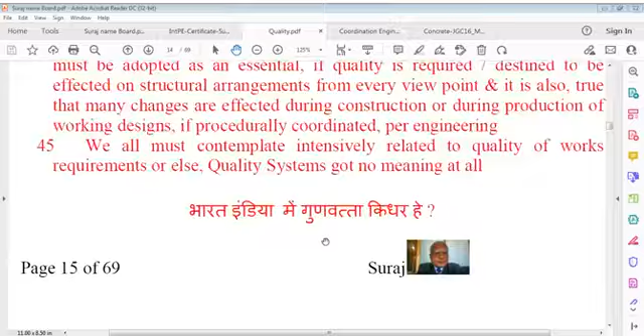And that's why I say real quality and real coordination are very important. And if you go down to that, you will find many things. I'll find something which I'm interested in, and it can be said that thinking and all that, thinking, synthesis, as I said, no conclusion without analysis, as we said here.

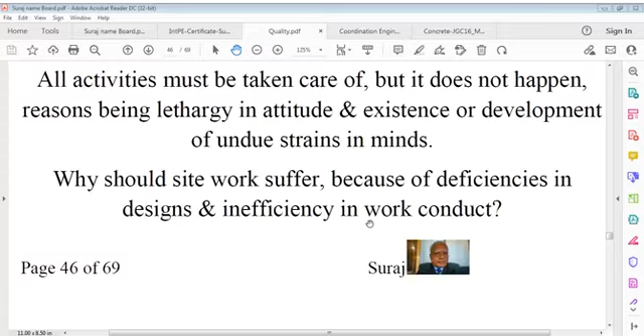Quality, reliability is defined, and we also say that reliability, risks are involved in this, cost is involved, time is involved, as we usually consider. These are certain factors we cannot leave out. Construction method statements are involved, which I say must be charted out professionally for works implementation. And also we can say, so these are certain points, certain references, I could sort of say.

That it can't be brought back, it is irrevocable. If we lose it, we can't recover it. And this is only money. Money means money in the sense of use, and if I don't use time, I cannot use it again. If I lose it, I lose it.

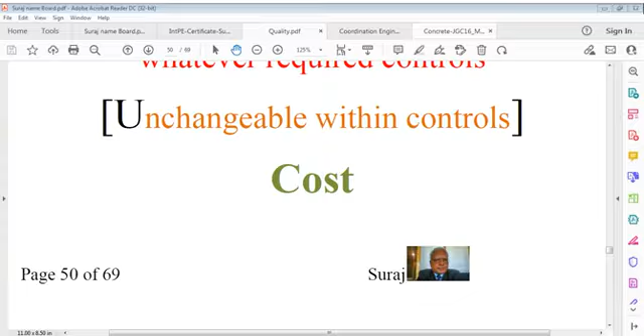Cost, I think, originally is nothing. It is just in relation to time. But cost may be recovered, it may not be recovered, but time lost cannot be recovered. And then you can say risks.

Risks are such an important factor that an intelligent, analytical person can understand, can foresee what sort of risk will be there. And also by experience we know how to think of that. And also we can say reliability, which is a very complicated word, complicated in the sense that it's not a single verb.

Or some adjective, it's a sequence or consequence, or you can say it's a kind of thread or a kind of string that you use in a word, and that includes safety from all involved factors, successful serviceability of intended purpose, and mandated durability. Durability, safety, and serviceability are very important factors, a minimum required. There can be many more added upon it.

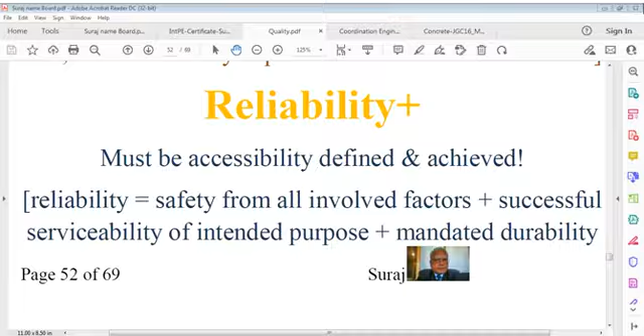And then comes analysis, which is educational power. Education should teach us about the power of analysis. In our education system, our professional system, whatever we learn, if we are not equipped with the potential of analysis, then I can't call myself educated, even if I'm a doctorate, a master's. But if I cannot analyze, I think analysis is the real word in place of critical thinking. Thinking is not enough if I can't analyze what I'm thinking.

Thinking is also related to analysis, and there may be many points, many sequences in analysis for some problem, to solve or to understand, even not to solve. Observe something and understand it, analyze it, and if you do that sequence correctly, it can be called a system of this activity, this observation, this object, or this system, whatever you can call it, entity. You can say I understand this completely, I've gone through its study, and my analysis says that it works like this. That's also analysis, though you have not added anything to it, you have not designed that. But try to analyze and go through total scrutiny, and you reach somewhere, okay I understand this way. That's also called analysis. In fact, science is based on complete observational analysis.

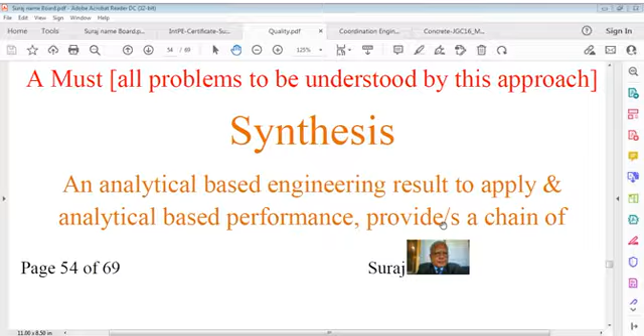So analytical work and synthetical work, both are important. Both are linked together. It doesn't mean physical change, it is really reorganization. Synthesis can be called organized, and analysis can be called study of every organ within that synthesis. So you can say analytical based engineering results in applying analytical based performance by chain, and therefore I think it's very important to understand that.

And thinking plus thinking, if you think and think on the same topic for long, it can be called concentration. But you do not divert your focus from what you are thinking, and you keep on that, and you get more and more power from your mind. This is practical, there's no requirement of any medical study on that, it is observation, feeling, experience. And to achieve everything, you should have that power.

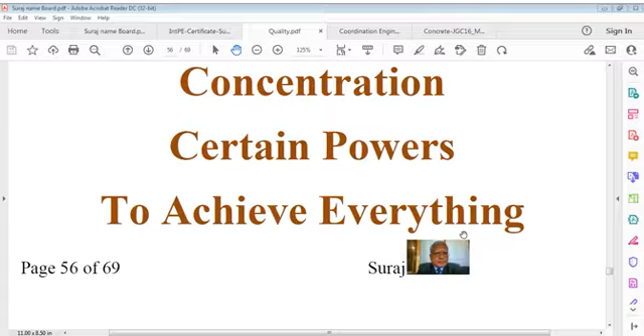If you have that power, you shall apply that. If you get that power, that concentration, there is no way you can leave it behind and go away, because more and more thinking means more and more concentration, and more concentration means more and more internal entertainment of mind, where you cannot say I'm feeling bored, rather you feel too happy, and if something else comes into your way, you don't like it at that moment. So to achieve everything, concentration and thinking are very important.

And we can say that thinking based contemplation must be achieved, and that's what design and execution works we call it. In fact, design is analytical work, concentration work, and we can call it engineering business, and we should not go against that. Whatever we decide, whatever we say, we have to achieve this, and that we have to conform with.

And if we cannot conform with that, it's called a non-conformist product, a substandard one, you can call it. To whatever level of substandard it is, it can be rejected also, because it's against that provision, against that engineering requirement which we decided, and no concession can be granted to that. Non-conformance means the engineer involved is careless, ignorant, or incompetent, and therefore redundant personnel.

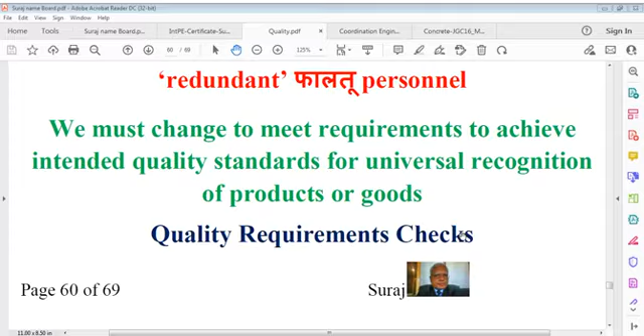Redundant means more than required. And if it's more than required, what do we use that engineer for? So we can say, if we have to do that, quality requirements are important, and quality means what we mandate.

It's a must, and we have to blame ourselves for quality achievement failure. If I say we could not achieve quality and give some reason for that, I don't think that works. Engineering is very serious as far as work is concerned. It's a very happy moment if you successfully do it. Engineering has both properties. If you are not able to get quality and production, you don't feel happy because you could not meet schedule or meet your target. This means it's a failure in engineering, both in quantity and quality.

And therefore, continuous improvement of quality is required. If you say continuous improvement of quality, abbreviated as CIQ, this means it should be completely continuous improvement of quantity also, because quality and quantity live together. They cannot live in separate areas, like Mr. Quality sitting here and Mr. Quantity sitting there. We cannot physically do it.

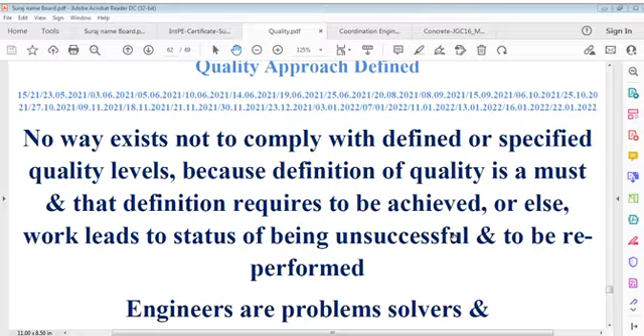And therefore, we can say no way exists not to comply with defined or specified quality levels, because definition of quality is a must. That definition requires to be achieved, or else work leads to status of being unsuccessful or has to be performed again.

Engineers are problem solvers, not problem creators. Engineers are problem solvers, and engineers are developers. Engineers are agents of change, agents of social change, design change, materials change, geographical change. That's an important point we have to think of. It's not because I am an engineer that I'm stating that, it's basics of engineering, because engineering means change, change and change.

Using mind, an engineer can convert a forest or a desert to a city or an industrial town, for which quality and safety, health and environment play integrated and merge vital roles in all respects. No concessions. In public, and if done without quality, you have acted against profession and nature.

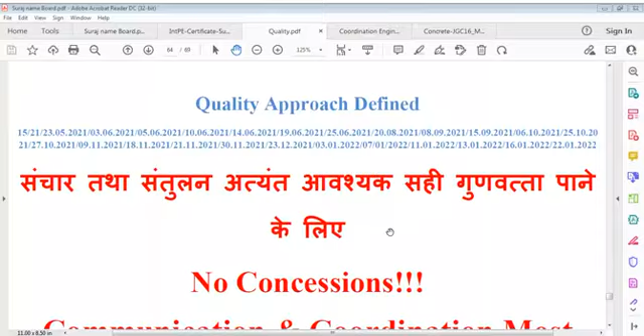Communication and coordination, most significant discipline subjects. Specifications is a must. Specifications are a must. Without specifications we cannot do.

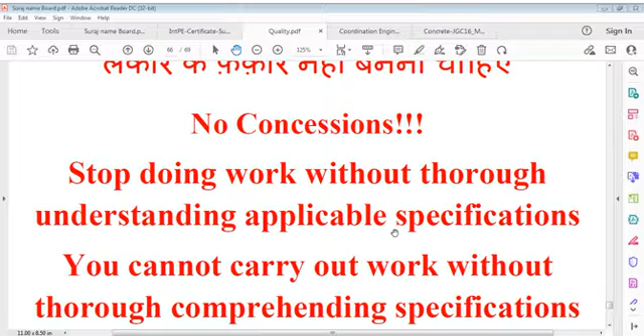Never follow any line which is not followable or not applicable to us. No concessions can be given, and if you do not know what to do, stop working without thorough understanding of applicable specifications. If you understand that you are doing right, that's fine. Otherwise, if you don't understand in clarity what is to be done, better delay it, because doing the wrong job is no good. It is better to delay rather than doing incorrect work, because once you involve material and workers and everything, then break it.

It's no use, it's national wastage and natural wastage both. You cannot carry out work without thoroughly comprehending specifications, and you must understand what you have to do, and that's called comprehension of specifications. Quality in construction, quality in life, quality in service, quality in every work, quality in education, quality in society, quality in individual. All these are equally important.

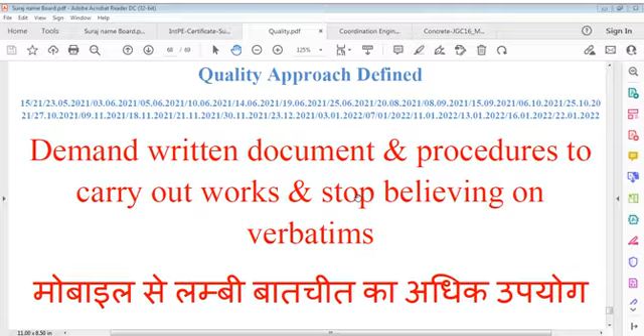To an extent, just like we have a breathing system in our body, in the same way quality breathes in works. And therefore it should be in document what we have to do. It should be written clearly. Demand written document and procedures to carry out works, and stop believing on verbatims.

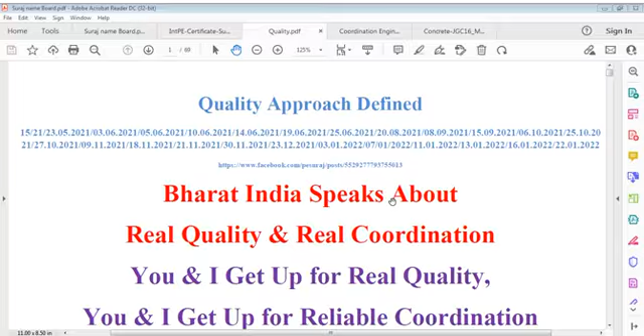That's what's important. As said about mobiles, we don't talk too much on mobile, because it wastes your time, wastes the time of others, and unnecessarily wastes your energy. You have to talk to others, and others have to talk to you. You have to provide opportunity to everybody. Other person should not wait to contact you just because you are busy somewhere else, and that's not good practice. Don't waste your money, don't waste your time, don't waste your energy. That's what Bharat, India speaks about.

Bharat is the Hindi word, India is the English word. Bharat, India - we usually say that just to arouse people, to enthuse people, that it is Bharat, we are citizens of Bharat, and we have to be like this. Bharat, India speaks about it, we have to be very much happy about that.

Real quality and real coordination means real, not imaginary. If real means whatever we define, of what work we have to do, how we have to do it, what's its real way, and under what economical consideration we have to do it, what's the intention behind that, what purpose, what for it is there. We have to define tolerances ourselves, define limits ourselves as engineers, or as those in power of works, and what the employer or owner intends for. If something is required for certain, we have to define that requirement.

It's not necessary everything should be same, it depends on what level of quality is required in this, what level of strength is required in this, that depends. And that's what technical specifications, item specifications required, include project specifications.

So that is what real quality design, you may call it design of quality, and you have to give it in written form, and that's called communication. And the written form should coordinate with all such communications. We cannot say one point here, other point somewhere else - that doesn't mean you do not coordinate on that. The real coordination is you have to put all these items in a kind of string, in follow-up sequence, so that you should be able to retrieve that immediately.

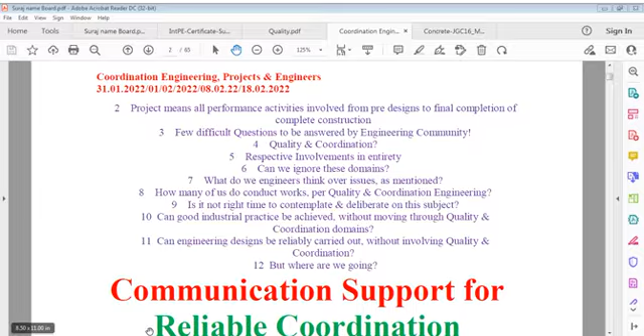What we are doing, that's the point. Often this is just a few words. I could not give more details on these projects I do, but I just don't find time for that. What to do means we have to understand coordination. That's the important one, you can say.

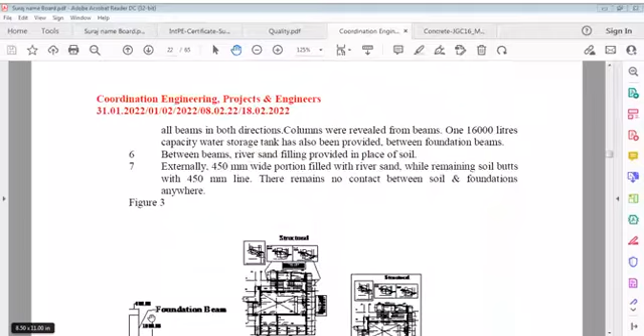Actually I thought in a different way, but it's happening as something else. So I can say here, coordination engineering is a must on every project, which is the title, and that point can't be defied. Every day something is important to be comfortable with, and we have to understand the reality of this: that coordination engineering is a must on every project.

Designs, construction, and controls are very solidly interrelated, absolutely interrelated, required sections for achieving from successful start to completion of a project, which all must be applicable throughout project stages, with all works being effective. That's really a wonderful point we have to think of.

Designs, construction, and control are very solidly interrelated, required sections for achieving from successful start to completion of a project, which all must be applicable throughout project stages, with all works being smoothly effective.

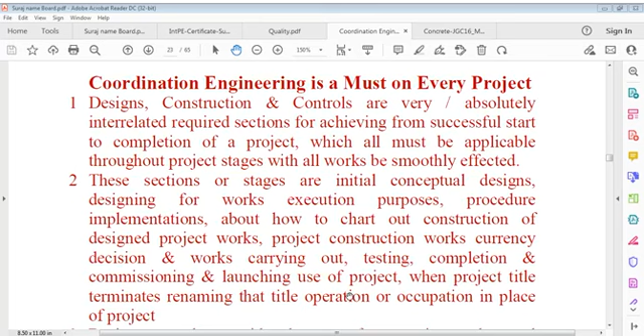That's why I said the designs, construction, controls are very absolutely interrelated, required sections for achieving successful start to completion of a project, which all must be applicable throughout project stages, with all works be smoothly effected. These sections or stages are initial conceptual designs, designing for works execution purposes. Designing for works execution purposes means initial design of project is different, but when you do it, that's also required to design how to do it. Procedure implementation, you can say, is about how to chart out construction of design project works. Then you can say project construction works, currency decision and works, all that. Carrying out testing, completion, commissioning and launching. All these are very important points we have to consider. We can't get rid of these without doing that.

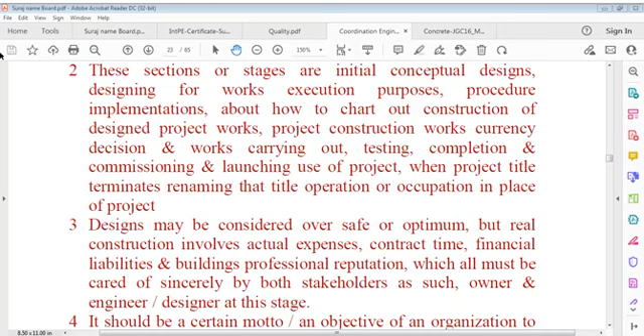So, like say, these sections or stages are initially conceptual designs and designing, and also you have to do it, and that's also called design. How to do it, how to plan it, how to work on all these requirements of doing, planning, scheduling, quality, method, construction, quantification, quality handling, testing, completion, electrical, mechanical, civil, or decoration, or whatever else. So much is involved. We should not be worried about that, but that's a different domain. Design part, construction part, planning part, quality part. Of course every part is specialized. It's not academically, it's specialized practically. It's specialized work-wise. So we must be sure about that.

You may say my design is safe or oversafe or optimum, but real construction involves expenses. Real construction involves materials, resources, time, everything, and use of that project. So that is a different world. Design cannot be done if it's not worth it, if it's not professionally done. I don't mean that you should do extraordinary design, but we have to design. Design should be done keeping in view ease of construction, best construction with best quality. And that's a point we have to see.

Difficulties on works which are expected must be anticipated by designers. Designer doesn't mean pure designer. Designer must have experience, or if one does not have experience, then one has to consult those who have such experience. Just like site people or works people consult experts in capacity as consultants. These site people's work is checked. It's also a kind of consultancy, you can say. You call a consultant, have check on this, examine, approve this one. That's also a kind of consultancy. The consultant makes sure, along with the site person, that this work is approved. Approved means I have seen this and I find there's no problem in this. Approval doesn't mean that it's authority or liability or something else. This means, okay, I have made sure this person has worked according to requirement, and that's just a kind of authentication that yes, we have seen this. But the responsibility lies with the person who did it. Remember, the consultant has no responsibility as far as liability is concerned.

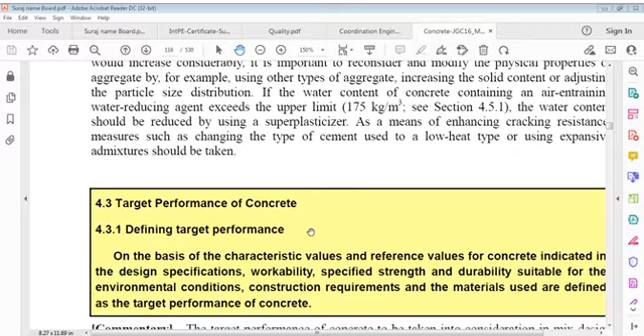and the determination of mix requirement, select materials and determine provisional proportions. We had gone through. Then we had gone through the target performance of concrete. Let's say what is target performance of concrete, defining target performance. Maybe if you have studied last time, no problem, we can review this.

Target performance on basis of characteristic values and reference values for concrete indicated in design specifications, workability, specified strength and durability, suitable for environment conditions, construction requirements and materials used, are defined as target performance of concrete. It says, on basis of characteristic values and reference values for concrete indicated in design specifications, workability, specified strength and durability, suitable for environment conditions, construction requirements and materials used are defined as target performance of concrete.

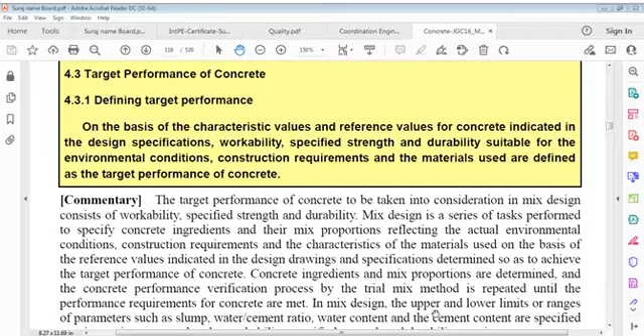Commentary says target performance of concrete to be taken into consideration in mix design consists of workability, specified strength, durability. We discussed this last time. Mix design is a series of tasks performed to specify concrete ingredients and their mix proportions to reflect actual environment conditions, construction requirements and characteristics of materials used, on basis of reference values indicated in design drawings and specifications, determined so as to achieve target performance of concrete.

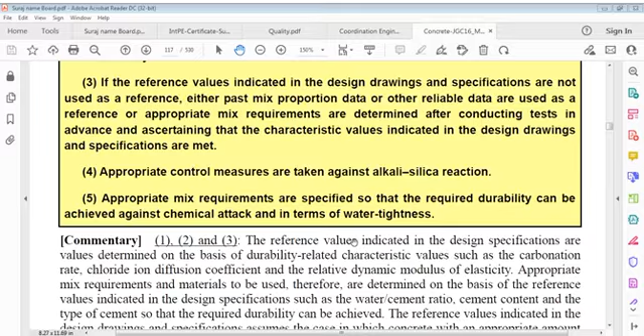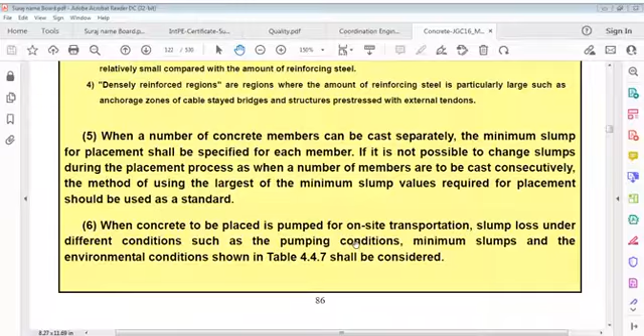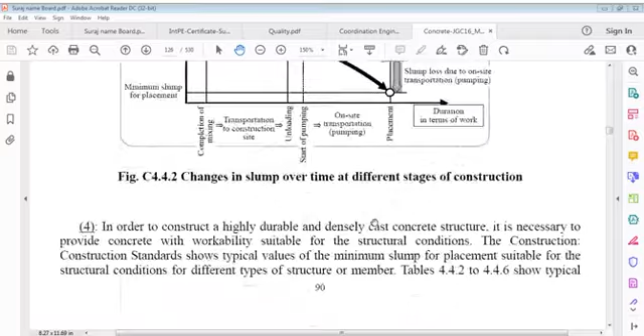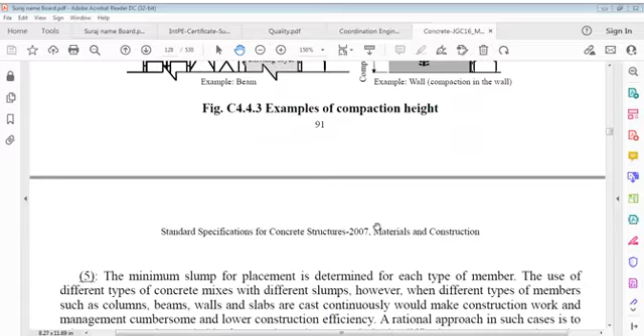Mixing water cement ratio we have gone through, and we had gone through. There are some mixed requirements we have gone through. We have gone through these slump values. I'm just trying to tell you what we had done before. This we had done, and of course we have to go to typical values of minimum slump we have gone through. I'm just trying to find means for something refreshing. Then we have gone through all this, and now we have to say we have gone through this also, flow chart for slump determination at different stages. And here is what we say. Here is, we'll go to this also we have gone through. Remember all these points we have gone through. Changes in slump over time, gone through. Standard construction methods, of course we have gone through this. We have gone through this compaction height as well, and we say example of compaction height that you have seen means from where we stand on the platform down to where concrete is, new layer of concrete is, and also previous layer we have to consider. It is more a design factor there. Okay, we have not gone through this, so let's be back here and think of how to do it.

Now required strength, here this we have gone through, this we have already gone through. Let us see this part, something to remember. Let us repeat this.

In construction standards, compaction height, which is related to degree of ease or difficulty of compaction, and placing height, which is a widely used term, are distinguished. Compaction height is defined as the height from the working platform on which construction workers stand to the lower end of the formwork or the upper surface of the previously cast concrete layer.

If concrete is placed continuously and compaction is performed while moving upward as the height of newly placed fresh concrete increases, the distance from the moved working platform to the surface of previously placed concrete is the compaction height. So let us repeat: if concrete is placed continuously and compaction is performed while moving upward as the height of newly placed concrete increases, the distance from the moved working platform to the surface of previously placed concrete is the compaction height.

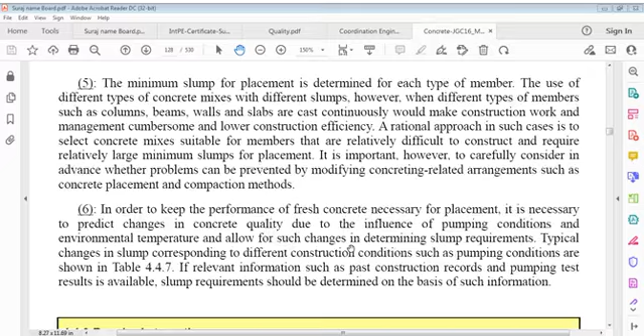It's important, however, to carefully consider in advance whether problems can be prevented by modifying concreting related arrangements, such as concrete placement, in order to keep the performance of fresh concrete necessary for placement. It is necessary to predict changes in concrete quality due to the influence of pumping conditions and environmental temperature, and allow for such changes in determining slump requirements.

Typical changes in slump correspond to different construction conditions, such as pumping conditions. If relevant information such as past construction records and pumping test results is available, slump requirements should be determined on the basis of such information. We also have to think of required strength of concrete, which is determined from the specified strength.

What is specified strength, and what is required strength? Specified strength and required strength - required is higher than the specified strength. It should be according to common sense.

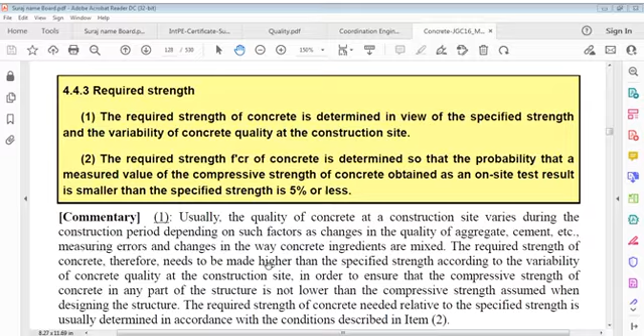Required strength, f'cr of concrete, is determined so that the probability that a measured value of compressive strength of concrete obtained as an on-site test result is smaller than specified strength is 5% or less.

What's the commentary here? Quality of concrete at a construction site usually varies during the construction period depending on factors such as changes in quality of aggregate, cement, etc. There can be measuring errors and changes in the way concrete ingredients are mixed. Required strength of concrete, therefore, needs to be made higher than specified strength.

Required strength of concrete needs to be made higher than specified strength according to variability of concrete quality at the construction site, in order to ensure that the compressive strength of concrete in whatever part of the structure is not lower than the compressive strength assumed when designing the structure. Required strength relative to specified strength is usually determined in accordance with conditions. Now, what are these conditions?

This clause describes compressive strength requirements for test specimens to be used to achieve specified strength of concrete.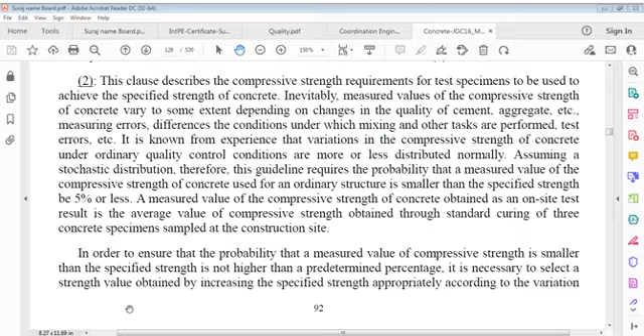Test errors, of course. It's known from experience that the variations in compressive strength of concrete under ordinary quality control conditions are more or less distributed normally, assuming a stochastic distribution.

Stochastic distribution - everybody would like to know what stochastic means. Not everybody can understand that, and that's fine. We have to explain it in Hindi. That's the problem - stochastic.

Stochastic meaning: stochastic is having a random probability distribution or pattern that may be analyzed statistically but may not be predicted precisely.

Let me refer to a more explanatory source. It's a Greek word. Stochastic refers to the property of being well described by a random probability distribution. Although stochasticity and randomness are distinct, in that the former refers to a modeling approach and the latter refers to the phenomena itself, these two terms are often used synonymously. Furthermore, in probability theory, the formal concept of a stochastic process is also referred to as a random process.

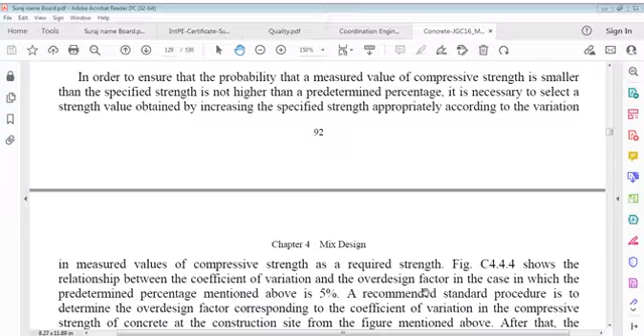In order to ensure that the probability that the measured value of compressive strength is smaller than specified strength is not higher than a predetermined percentage, it's necessary to select a strength value obtained by increasing specified strength appropriately according to variation in measured value of compressive strength, as required strength.

The figure shows a relationship between coefficient of variation and over-design factor in cases where the predetermined percentage is 5. A recommended standard procedure is to determine the over-design factor corresponding to coefficient of variation in compressive strength of concrete at the construction site from this figure, after which over-design factor and specified strength of an appropriate value are selected, and it should not be smaller than the required strength of that structure.

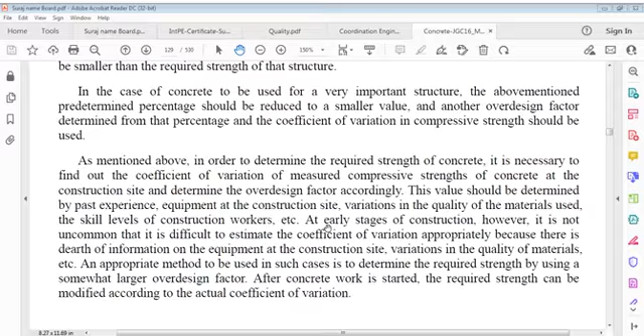In case of concrete to be used for a very important structure, this predetermined percentage should be reduced to a smaller value, and another over-design factor determined from that percentage and coefficient of variation in compressive strength should be used.

As mentioned before, in order to determine required strength of concrete, it is necessary to find out the coefficient of variation of measured compressive strengths of concrete at the construction site and determine the over-design factor accordingly.

This value should be determined by past experience, equipment at the construction site, variations in quality of materials used, and skill level of construction workers. These are the factors that determine the coefficient of variation and compressive strength on site.

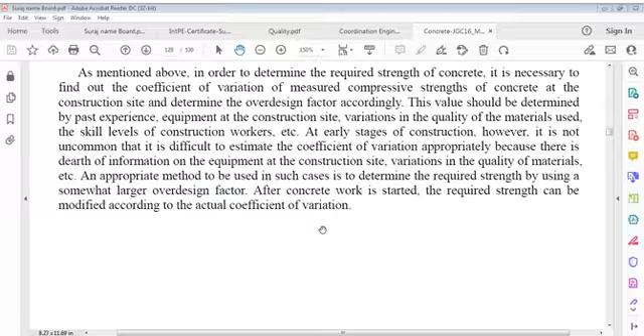At early stages of construction, however, it's not uncommon that it is difficult to estimate coefficient of variation appropriately because there exists a dearth of information on equipment at the construction site, variations in quality of materials, etc. An appropriate method to use in such cases is to determine required strength using a somewhat larger over-design factor. After concrete work is started, required strength can be modified according to actual coefficient of variation.

Now, the over-design factor in the normal case, here we have the expected coefficient of variation in compressive strength, that is V percentage wise. Expected variation, this V is for compressive strength, and over-design factor is alpha. Here it goes 5, 10, 15, 20, 25 in percentage, and this is the coefficient alpha. It's given an alpha value, and its equation is as follows.

This is 1 divided by 1 minus 1.645 times V over 100, in brackets. So if you plug in values, between 1 and 1 plus alpha, for example here alpha is less than 1.1, here maybe it's 1.2, here alpha is somewhere around 1.33, and here it goes to 1.7.

So this is the over-design factor depending on variation in compressive strength. As I said, variation in compressive strength and alpha factor - so more variation in percentage means more alpha factor.

That might be hard to understand. Alpha here - what is alpha? Let's say the equation is 1 divided by some coefficient, which would be 1 minus 1.645 times percentage.

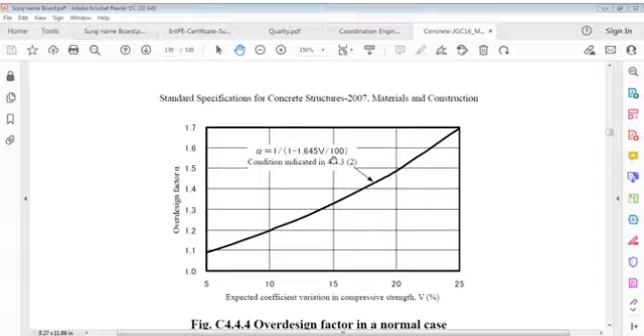1.645, 1 minus that, that's the margin, so it's something like that. We have to calculate it accordingly, and you can say this is generally at the 5% level.

Let's say there's some more variation. More variation means a greater value here and more less than 1, so the factor would increase, right? Let's say there's 25% variation - it says alpha is equal to 1.7. If it's 20% variation, alpha is about less than 1.5. If it's 15% variation, it's 1.33 something. And at 10% variation, it's 1.2.

So here, if it's 5% variation it's 1.1. And if there's no variation, that's what I say about water cement ratio. Water cement ratio, as you know very well, is a very important part of engineering, particularly concrete. It's a very, very important part.

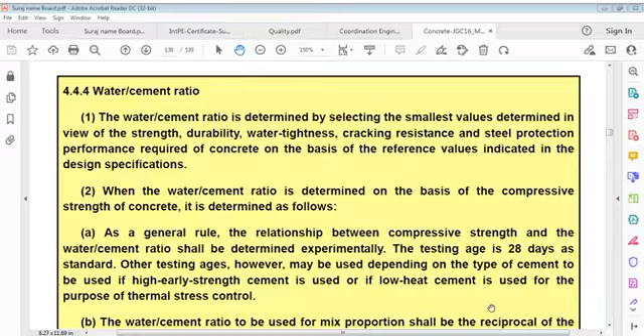This water cement ratio is determined by selecting the smallest value, determined in view of strength, durability, water tightness, cracking resistance, and steel protection. We have already studied this. Water cement ratio is determined by selecting the smallest value determined in view of strength, durability, water tightness, cracking resistance, and steel protection, performance required of concrete on basis of reference values indicated in design specifications.

When water cement ratio is determined on basis of compressive strength of concrete, it is determined as follows. So how to determine it? Let's see. Compressive strength of concrete, how do we determine that? As a general rule, the relationship between compressive strength...

and water cement ratio shall be determined experimentally. Testing age is 28 days, as we all know as the standard. Other testing ages, however, may be used depending on the type of cement to be used, if high-early-strength cement is used, or if low heat cement is used for purpose of thermal stress control.

Water cement ratio to be used for mix proportion shall be reciprocal of cement water ratio corresponding to required strength, F-CR, in the relationship between cement water ratio C/W and compressive strength f'c at reference age.

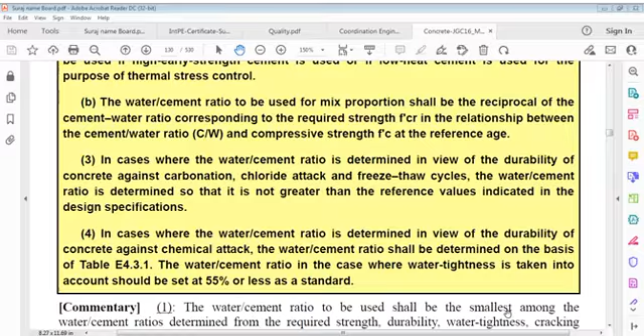In cases where water cement ratio is determined in view of durability of concrete against carbonation, chloride attack, and freeze-thaw cycles, water cement ratio is determined so that it is not greater than the reference value indicated in design specifications. In cases where water cement ratio is determined in view of durability of concrete against chemical attack, water cement ratio should be determined on basis of the given table.

Water cement ratio in case where water tightness is taken into account should be set at 55% or less as standard. Water cement ratio to be used shall be the smallest among water cement ratios determined from required strength, durability, water tightness, cracking resistance, and steel protection performance of concrete. Again I say, water cement ratio to be used shall be the smallest among water cement ratios determined from required strength, durability, water tightness, cracking resistance, and steel protection performance of concrete.

Under normal conditions, water cement ratio determined taking these factors into account rarely exceeds 65%, or 0.65. However, many problems encountered in the past occurred in structures built with concrete with a water cement ratio exceeding 65%.

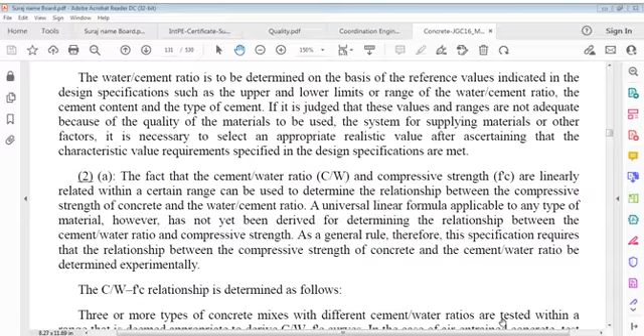The fact that cement water ratio and compressive strength, F-C, are linearly related within a certain range can be used to determine the relationship between compressive strength of concrete and water cement ratio. A universal linear formula applicable to any type of material, however, has not yet been derived for determining the relationship between cement water ratio and compressive strength. As a general rule, therefore, this specification requires that the relationship between compressive strength of concrete and its cement water ratio be determined experimentally.

So what do we do? Cement water ratio to strength relationship is determined as follows. Three or more types of concrete mixes with different cement water ratios are listed or tested within a range that is deemed appropriate to derive the cement water to F-C curve. In case of air entrained concrete, test specimens are prepared using concrete mixes with the required air content.

What we are deciding here is cement water ratio, water cement ratio. Water cement ratio is to be determined on the basis of reference values indicated in design specifications, such as upper and lower limits, range of water cement ratio, cement content, and type of cement. If these values and ranges are not adequate because of quality of materials, supply system, or other factors, it's necessary to select an appropriate realistic value after ascertaining that characteristic value requirements specified in design specs are met.

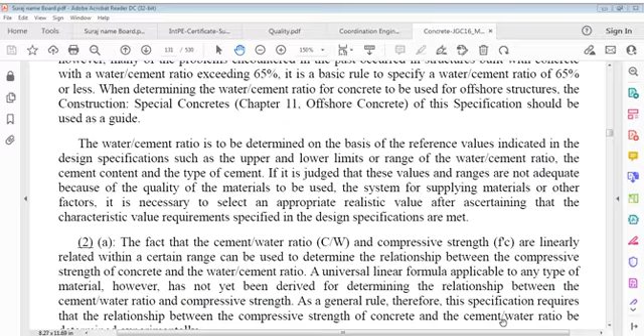The fact that cement water ratio and compressive strength are linearly related within a certain range can be used to determine the relationship between compressive strength and water cement ratio. However, a universal linear formula applicable to whatever type of material has not been derived yet for determining this relationship.

As a general rule, this specification requires the relationship between compressive strength of concrete and cement water ratio to be determined by testing three or more types of concrete mixes with different cement water ratios within a range deemed appropriate, in order to derive the curves.

In case of air entrained concrete, test specimens are prepared by using concrete mixes with required air content. In order to minimize errors in mixed tests...

My battery is now 45%.

In order to minimize errors in mixed tests, the average value for specimens prepared from two or more batches of concrete should be used as the value of strength for each cement water ratio.

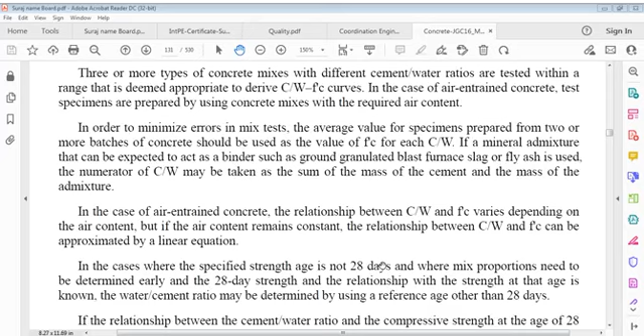If a mineral admixture that can be expected to act as a binder, such as ground granulated blast furnace slag or fly ash, is used, the numerator of the cement water ratio may be taken as the sum of the mass of cement and mass of admixture. In case of air entrained concrete, the relationship between this ratio and strength varies depending on air content. If air content remains constant, the relationship between cement water ratio and strength can be approximated by a linear equation.

In cases where the specified strength age is not 28 days and where mixed proportions need to be determined early, and where the relationship between 28 day strength and strength at that age is known, water cement ratio may be determined by using a reference age other than 28 days. If the relationship between cement water ratio and compressive strength at age 28 days has been fully ascertained, the above mentioned procedure is omitted.

If homogeneous concrete is to be made, it is necessary to use homogeneous materials, measure them accurately, and mix them sufficiently. Even if these tasks are performed, however, variation in quality of concrete is inevitable.

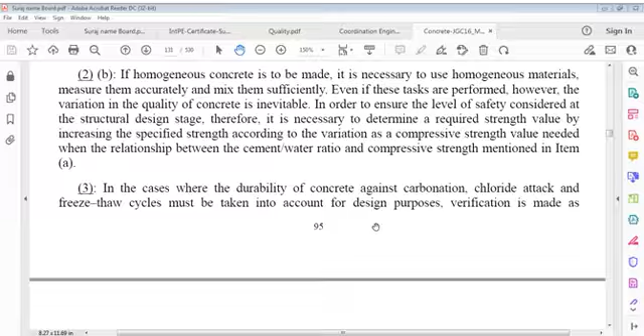In cases where durability of concrete against carbonation, chloride attack, and freeze-thaw cycle must be taken into account for design purposes, verification is made as described in the design general requirements of this specification, and the necessary upper limit of water cement ratio is indicated in design specifications as a reference value. It is therefore necessary to determine the water cement ratio so that this value is not exceeded.

When a high quality mineral admixture is used appropriately, the denominator of the water cement ratio needed from the viewpoint of durability may be taken as the sum of the mass of cement and the mass of admixture.

When coming into contact with soil or water containing a substantial quantity of sulfate, concrete is eroded by chemical reaction. The aim of this clause is to ensure that strong and voidless concrete that is highly durable against such chemical reaction can be obtained.

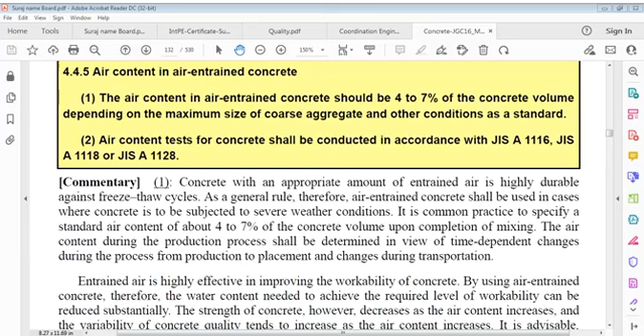Air content in air entrained concrete should be 4 to 7% of concrete volume, depending on maximum size of coarse aggregate and other conditions. Air content tests for concrete shall be conducted in accordance with JIS A 1116, JIS A 1118 or JIS A 1128.

Concrete with an appropriate amount of air entrained content is highly durable against freeze-thaw cycles. As a general rule, therefore, air entrained concrete shall be used in cases where concrete is to be subject to severe weather conditions.

Common practice is to specify a standard air content of about 4 to 7% of concrete volume upon completion of mixing. Air content during the production process shall be determined in view of time-dependent changes during the process from production to placement and changes during transportation.

Entraining air is highly effective in improving workability of concrete. By using air entrained concrete, water content needed to achieve required workability can be reduced substantially. Strength of concrete, however, decreases as air content increases, and variability of concrete quality tends to increase as air content increases. It is therefore advisable not to increase air content excessively if weather conditions are not severe.

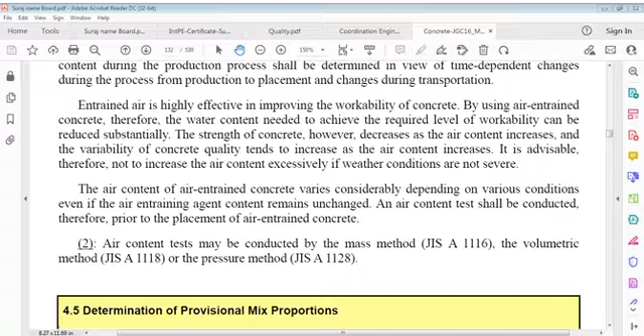Air content of air-entrained concrete varies considerably depending on various conditions. Even if air entraining agent content remains unchanged, an air content test shall be conducted prior to placing air-entrained concrete.

Air content tests may be conducted. Now, determination of provisional mix proportion: water content.

Determination of provisional mix proportions. Water content is determined experimentally and shall be made as low as possible to the extent that concreting tasks can be performed. Upper limit of water content of concrete should be 175 kg per cubic meter as a standard. If water content exceeds this upper limit, it shall be ascertained that required durability is attained.

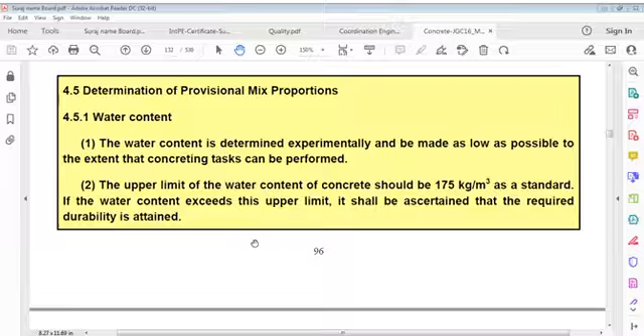A higher water content tends to result in degradation of quality of concrete, such as degradation in segregation resistance and an increase in drying shrinkage. It is therefore necessary to make water content as low as possible to the extent that concreting tasks can be performed.

Water content of concrete required to achieve required slump differs depending on such conditions as maximum size of coarse aggregate, particle size distribution and particle shape of aggregate, type of admixture, and air content of concrete. This specification requires that water content be determined through trial mixing by use of materials to be actually used for construction.

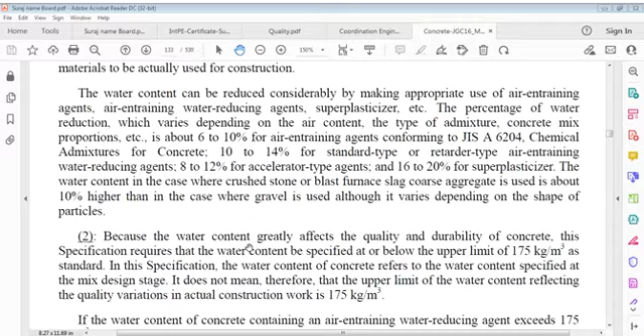Because water content greatly affects quality and durability of concrete, this specification requires that water content be specified at or below an upper limit of 175 kg per cubic meter as a standard. In this specification, water content of concrete refers to water content specified at the mix design stage. It doesn't mean, therefore, that the upper limit of water content reflecting quality variation in actual construction work is 175.

If water content of concrete containing an air entraining water reducing agent exceeds 175 kg per cubic meter, a superplasticizer instead of an ordinary air entraining water reducing agent should be used so that water content becomes 175 kg per cubic meter or less. In case of plain concrete, however, where it can be ascertained that durability of concrete will not be adversely affected, water content higher than this may be allowed.

Water content higher than 175 kg per cubic meter may be allowed in such cases. Lower value of water content is not specified, but water content should be 145 kg per cubic meter or higher when using crushed stone or crushed sand.

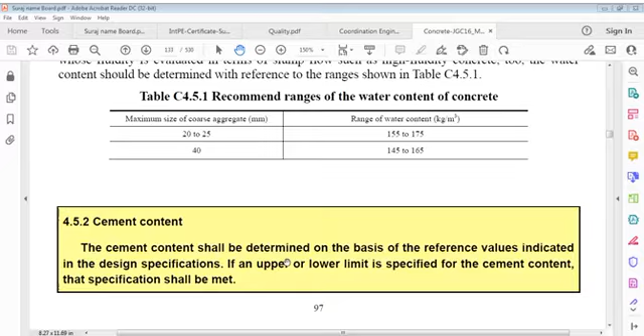Cement content shall be determined on the basis of reference values indicated in design specifications. If an upper or lower limit is specified for cement content, that specification shall be met.

Cement content shall be determined on the basis of reference values indicated in design drawings and specifications. If an upper or lower limit is specified for cement content, it shall be ascertained that cement content determined from water content and water cement ratio falls within the upper and lower limit.

It shall be ascertained that cement content determined from water content and water cement ratio falls between the upper and lower limit specified. If it doesn't fall within the range between the upper and lower limits, it's necessary to change the material used for mix design or mix proportion.

In case of concrete made by using a superplasticizer, if cement content is too small, it tends to result in poor workability and degradation in slump.

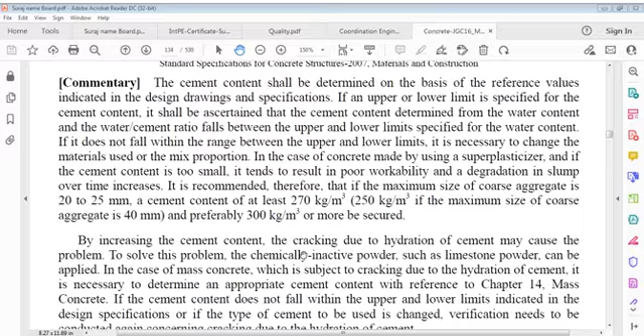Over time, slump loss increases. It's recommended therefore that for a maximum size of coarse aggregate of 20 to 25 mm, cement content should be at least 270 kg or 250 kg per cubic meter. For maximum size of coarse aggregate of 40 mm, preferably 300 kg per cubic meter or more should be used. By increasing cement content,

cracking due to hydration of cement may cause a problem. To solve this problem, chemically inactive powders such as limestone powder can be applied in case of mass concrete,

which is subject to cracking due to hydration of cement. If it's necessary to increase cement content, cracking due to hydration of cement may cause a problem.

To solve this issue, chemically inactive powder such as limestone powder can be applied. In case of mass concrete, which is subject to cracking due to hydration of cement, it is necessary to determine an appropriate cement content with reference to mass concrete. If cement content does not fall within upper and lower limits indicated in design specifications, or if the type of cement used is changed, verification is required regarding cracking due to hydration of cement.

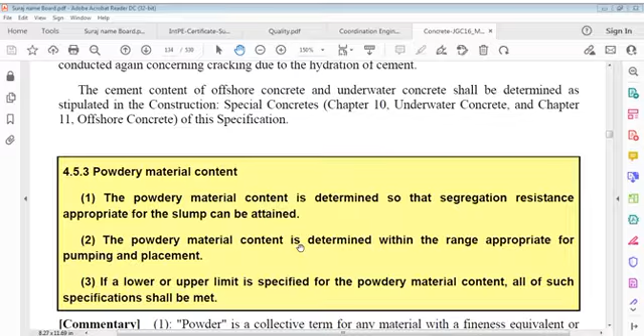Powdery material content is determined so that segregation resistance appropriate for slump can be attained, and is determined within a range appropriate for pumping and placement. If a lower or upper limit is specified for powdery material content, all such specifications shall be met.

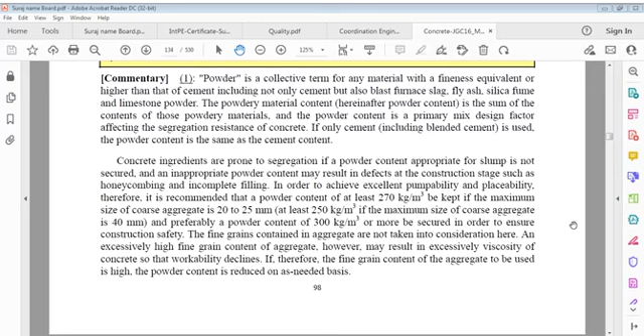My dear friends, commentary is about that. We are talking about commentary in this case, about powder material contents, and that's very important. Commentary about this powder, what that is, and it's really important to understand, and we are going to understand that.

Powder is a collective term for whatever material has a fineness equivalent to or higher than that of cement, including not only cement but also blast furnace slag, fly ash, silica fume, and limestone powder. Powdery material content is the sum of the content of those powdery materials, and powder content is a primary mix design factor affecting segregation resistance of concrete. If only cement or blended cement is used, powder content is the same as cement content.

It's indeed true: concrete ingredients are prone to segregation if a powder content appropriate for slump is not secured. And an inappropriate powder content may result in defects at the construction stage, such as honeycomb and incomplete filling.

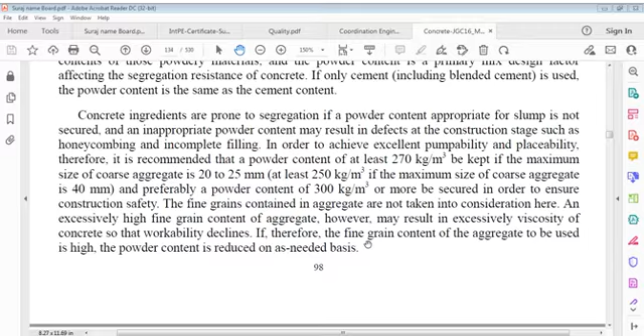Fine grains contained in aggregate are not taken into consideration here. An excessively high fine grain content of aggregate, however, may result in excessive viscosity of concrete, so that workability declines. Therefore, if a high fine grain content of aggregate is to be used, powder content is reduced on an as-needed basis.

It is recommended when determining a rough level of powder content appropriate for specified slump, in mix design, in order to perform smooth, clogging-free pumping, that it is necessary to keep powder content at or above a certain level.

If design specifications indicate an upper or lower limit of cement content, it is necessary to compare that upper or lower limit with powder contents determined, and determine powder content so that both requirements are met.

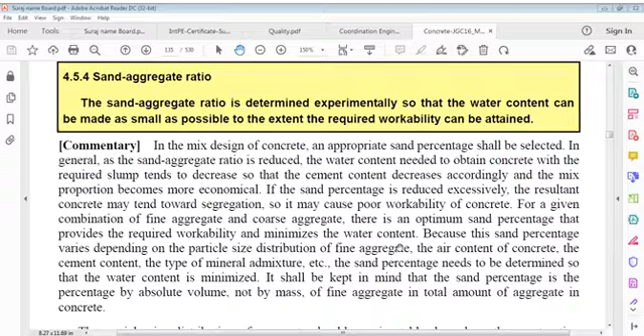For a given combination of fine aggregate and coarse aggregate, there exists an optimum sand percentage that provides required workability and minimizes water content. Because this sand percentage varies depending on particle size distribution of fine aggregate, air content of concrete, cement content, and type of mineral admixture, sand percentage needs to be determined so that water content is minimized. It shall be kept in mind that sand percentage is percentage by absolute volume, not by mass, of fine aggregate in total amount of aggregate in concrete.

Particle size distribution of aggregate should remain stable throughout the construction period. If fineness modulus has deviated by 0.2 or more from that of fine aggregate actually used for mixed proportion during construction, workability is also affected considerably. In such cases, mixed proportions need to be modified, and validity of sand percentage values should also be verified by testing.

In case of concrete pumping, it's necessary to select an appropriate sand percentage on the basis of available data and past construction data, according to concrete pump performance, piping, pumping distance, etc. If superplasticized concrete is used, sand percentage needs to be determined taking into account workability of superplasticized concrete.

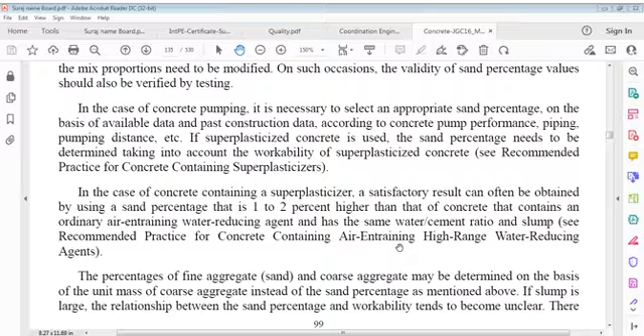In case of concrete containing a superplasticizer, a satisfactory result can often be obtained by using a sand percentage that is 1 to 2% higher than that of concrete containing an ordinary air-entraining water reducing agent with the same water cement ratio and slump. Percentage of fine aggregate and coarse aggregate may be determined on the basis of unit mass of coarse aggregate instead of sand percentage as mentioned above.

If slump is large, relationship between sand percentage and workability tends to become unclear. There are cases, therefore, where appropriate mix proportions can be better selected by determining unit mass of coarse aggregate first.

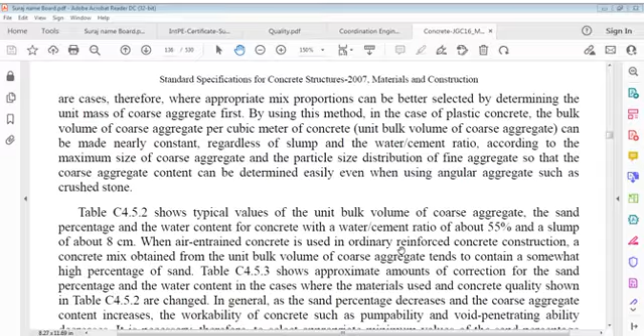By using this method, in case of plastic concrete, the unit bulk volume of coarse aggregate per cubic meter of concrete can be made nearly constant, regardless of slump and water cement ratio, according to maximum size of coarse aggregate and particle size distribution of fine aggregate, so that coarse aggregate content can be determined easily even when using angular aggregates such as crushed stone.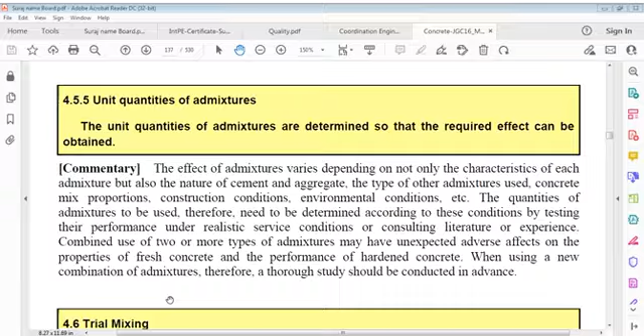Trial mixing, and it requires something - we have to be serious about trial mixing. Before that, I'll check something. I'll check it.

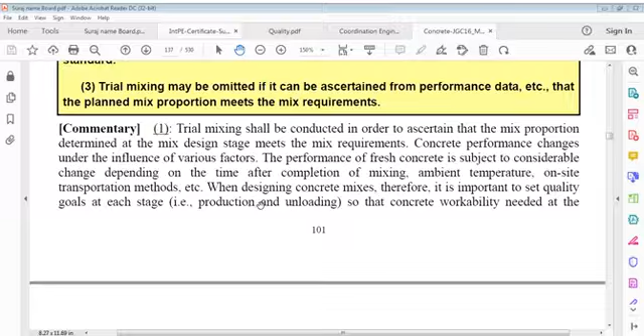Concrete performance changes under the influence of various factors. Fresh concrete is subject to considerable change depending on time after completion of mixing, its ambient temperature, and on-site transportation methods. When designing concrete mixes, it's important to set quality goals at each stage, that is production stage and unloading stage, so that concrete workability required at placement stage can be attained.

This section requires, therefore, that concrete mix proportions be determined through trial mixing prior to placement of concrete, so that concrete that meets performance requirements can be obtained. Trial mixing shall be conducted on an as-needed basis under direction of the Chief Concrete Engineer or a Concrete Engineer certified by the Japan Concrete Institute or an equally qualified engineer.

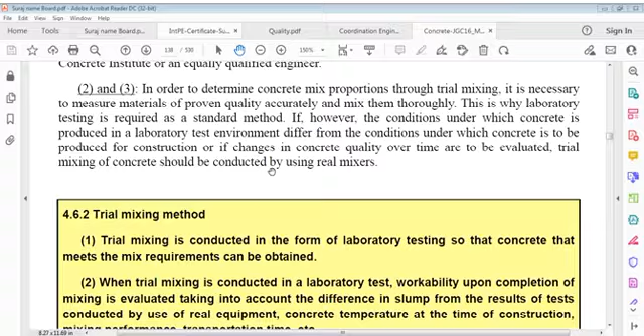Now, in order to determine concrete proportions through trial mixing, it's necessary to measure materials of proven quality accurately and mix them thoroughly. That's why laboratory testing is required as a standard method. If, however, conditions under which concrete is produced in the laboratory test environment differ from conditions under which concrete is to be produced for construction, or if changes in concrete quality over time are to be evaluated, trial mixing of concrete should be conducted using real mixers.

Trial mixing method. Trial mixing is conducted in the form of laboratory testing, so that concrete that meets mix requirements can be obtained. When trial mixing is conducted in laboratory test, workability upon completion of mixing is evaluated, taking into account difference in slump from results of tests conducted using real equipment, concrete temperature at time of construction, mixing performance, and transportation time.

Trial mixing of concrete should be conducted at 20 plus minus 2 degrees Celsius as standard. If trial mixing cannot be carried out under such test conditions, mix proportions shall be determined after making corrections for temperature difference. In a mix test using a test mixer, appropriate test items shall be selected.

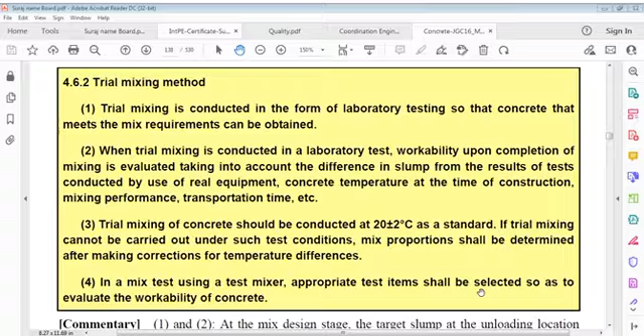So we can say trial mixing of concrete should be conducted at 20 plus minus 2 degrees Celsius as a standard. If trial mixing cannot be carried out under such test conditions, mix proportions shall be determined after making corrections for temperature differences. In a mix test using a test mixer, appropriate test items shall be selected so as to evaluate workability of concrete. Now, what is the commentary about this? You have to give some comments as well.

At mix design stage, target slump at unloading locations and target slump upon completion of mixing shall be determined, on the basis of minimum slump for placement, taking into account transportation time, waiting time at the construction site, and decrease in slump due to on-site transportation.

In trial mixing, conducted in the form of laboratory testing, it's necessary to make repeated corrections for mix proportions to achieve target slump at the unloading location or target slump upon completion of mixing, until the required minimum slump for placement can be obtained.

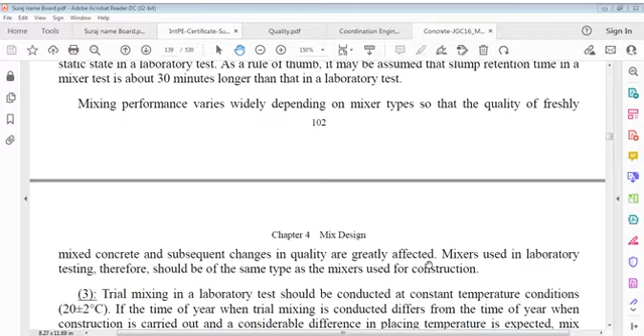The mixer used in laboratory testing therefore should be of the same type as the mixer used for construction, since mixing performance varies widely depending on mixer type, affecting the quality of freshly mixed concrete and subsequent changes in quality.

Trial mixing in laboratory test should be conducted at constant temperature conditions, that is 20 plus minus 2 degrees Celsius. If the time of year when trial mixing is conducted differs from the time of year when construction is carried out, and a considerable difference in placing temperature is expected, mixed proportions need to be determined taking into account that temperature difference.

Trial mixing in laboratory tests should be conducted at constant temperature conditions of 20 plus minus 2 degrees Celsius, where the time of year when trial mixing is conducted differs from the time of year when construction is carried out, and a considerable difference in placing temperature is expected. Mixed proportions need to be determined taking into account that temperature difference. It's also good practice to conduct trial mixing using mixers and correct mixed proportions derived through laboratory testing.

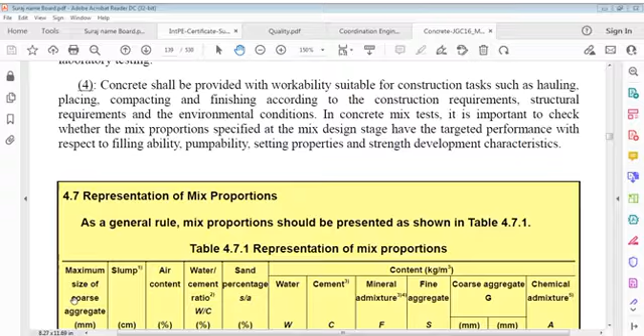Here is a representation of mixed proportions. We'll go into this as a general rule. Mixed proportions should be presented in the shown table. There are various columns: maximum size of coarse aggregate in mm, slump in centimeters, air content percentage, water-cement ratio percentage, sand percentage in relation to aggregate (sand-aggregate ratio), water content in kilograms, cement in kilograms, mineral admixture in kilograms, fine aggregate in kilograms, coarse aggregate (G) in mm, and of course chemical admixtures.

Note 1 describes standard methods to indicate target slump at the unloading location, if necessary. Minimum slump for placement and target slump upon completion of mixing are also indicated.

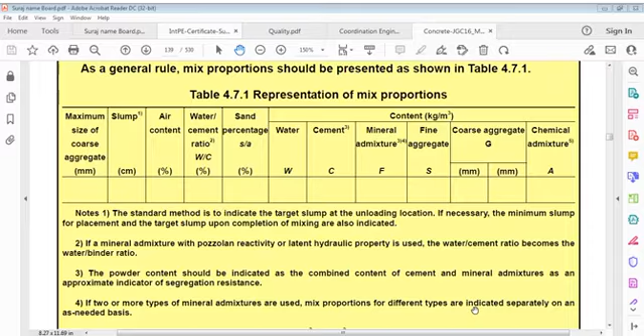If a mineral admixture with pozzolanic reactivity or latent hydraulic properties is used, water-cement ratio becomes water-binder ratio, and powder content should be indicated as the combined content of cement and mineral admixtures, as in equivalent cement.

Powder content should be indicated as combined content of cement and mineral admixtures, as an approximate indicator of segregation resistance. If two or more types of mineral admixtures are used, mixed proportions for different types are indicated separately on an as-needed basis. Chemical admixture content is indicated in milliliters per cubic meter or grams per cubic meter, and the quantity of undiluted and undissolved liquid should be indicated.

As a general rule, mixed proportions should be indicated by mass, and the content of each ingredient used in each cubic meter of mixed concrete must be indicated in the form of a mix.

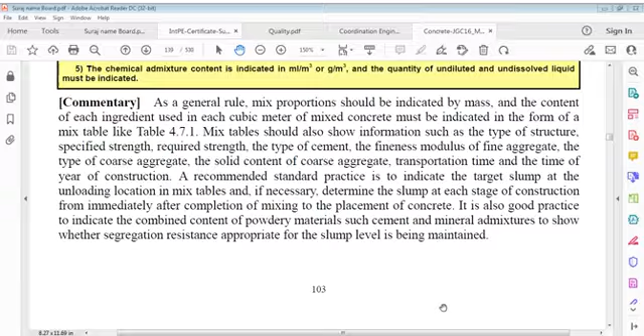Recommended standard practice is to indicate target slump at the unloading location in mix tables, and if necessary, determine slump at each stage of construction from immediately after completion of mixing to placement of concrete. It's also good practice to indicate combined content of powdery materials such as cement and mineral admixtures, to show whether segregation resistance appropriate for the slump level is being maintained.

Concrete production.

We have covered some good part today, I think the quality mix part of concrete. It's very significant from every viewpoint, and you cannot do without that. You have to consider that importantly at every location. It's very important to consider, it should be respected in every way, and we have to understand what we're talking about while talking. It's really important to understand that, and we have to be careful about this.

Concrete production: concrete with required quality shall be produced. Of course it must be, and we cannot say no to this. There is no way out about that, it has to be like that. We cannot say no to this, it has to be accordingly. Concrete with required quality shall be produced.

Equipment used for storage, batching, and mixing of materials shall be one that has been verified to have required performance. Methods of storing, batching, and mixing materials using equipment with the required performance shall be determined prior to production of concrete. Specialists with sufficient knowledge and experience shall be assigned to production of concrete to control quality of concrete materials, production equipment, and concrete.

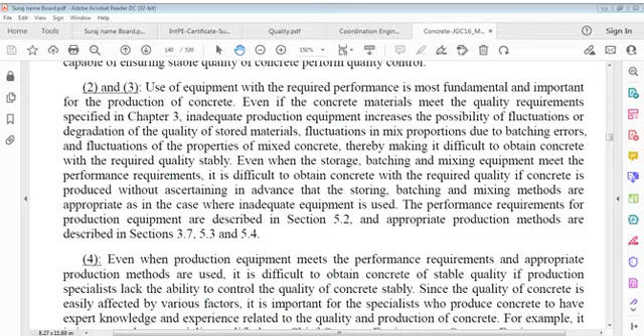We'll stop here, this is on page 140, and I think we will go for the next pages next time. We'll discuss the production plant, measuring equipment, mixers, capacity of batch, measurement of material, and whatever errors could be there.

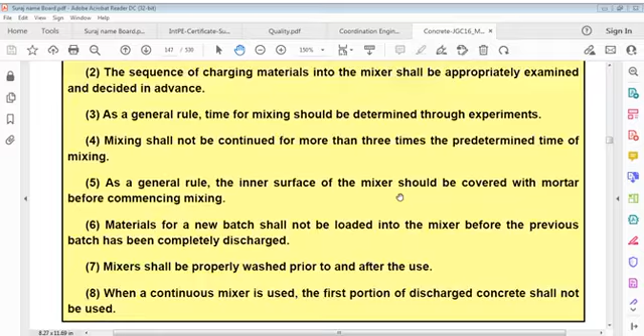It's of course an interesting one if you are serious, otherwise no meaning at all. If you're not serious, we have to be very comfortable with this. Now we have gone through today with many points here. We have gone through good temperament of reading, of referring, and talking of quality and coordination, and of course it's very important for everyone, but everyone is not capable of all this.

Now we're talking of concrete quality, which can't be avoided. Quality is quality, it's money, it's time, it's risk, everything, and we can't do without that. There's no way out. We can't say yes or no, we have to do it. There is no other way. If you think there's another way, then we live in a wrong world. Quality cannot be disregarded, and of course quality related issue, coordination, at no cost can be disregarded, because it is coordination that will help us at every point. You have to know what's happening inside.

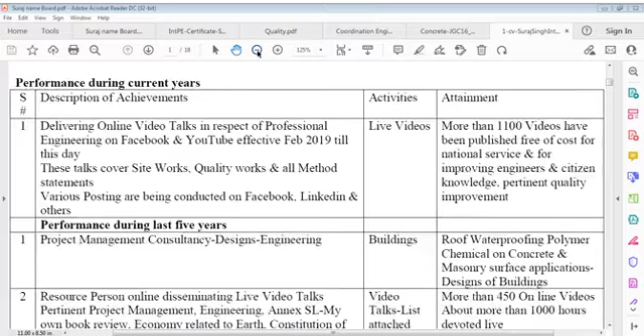I think it's gone, something happened. It should work, it's not working. I don't know, we overloaded the files.

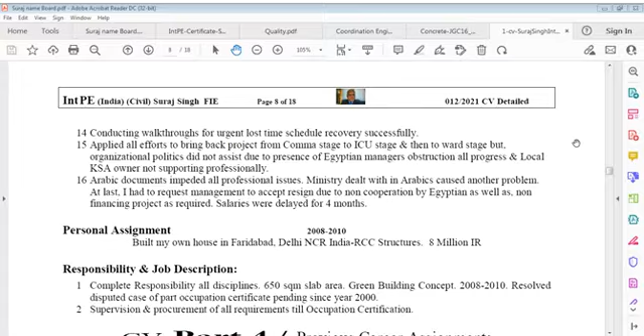So many parts of this CV are available, and we'll take time to discuss them together sometime. Meanwhile, just closing this, because this is a reference I'm showing you. Otherwise, I'm closing this also now, and we'll see what else to do. I'm closing this scenario today.